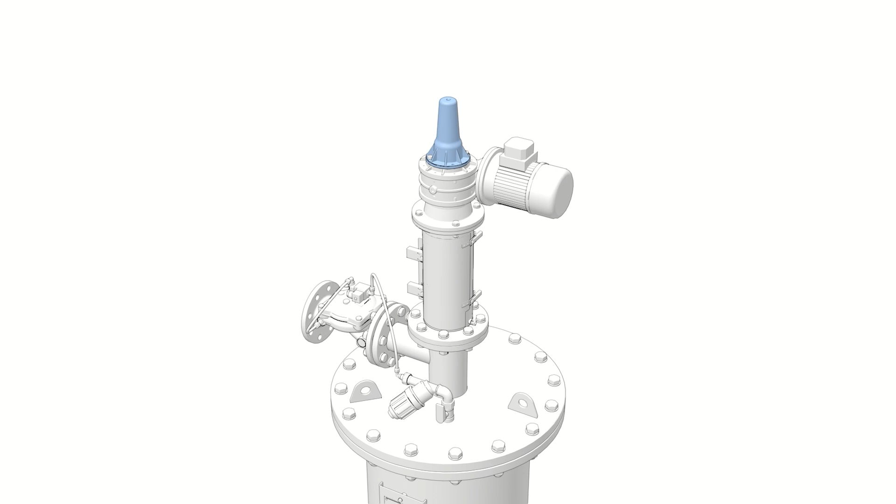To disassemble the drive unit, start with removing the cover by using an Allen wrench to release the 2 screws and remove the drive unit cover. Release the 2 toggle latch clamps holding the drive shaft housing cover and then remove the cover from the drive shaft housing.

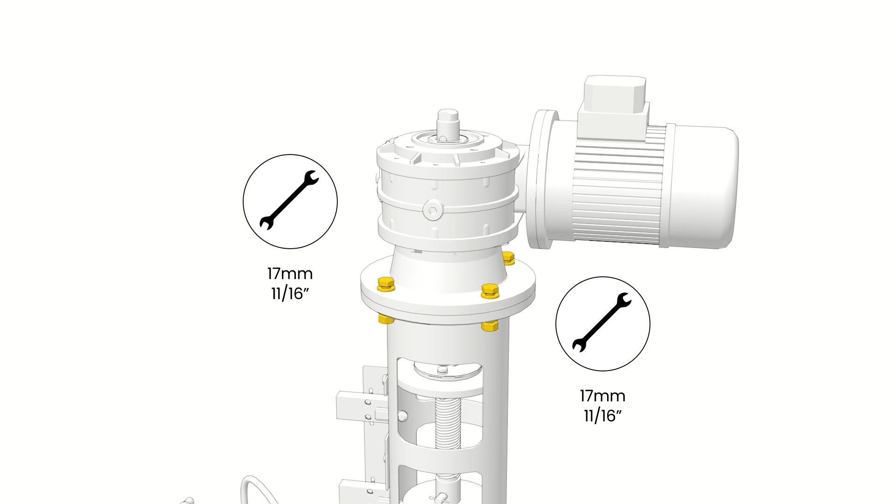To disconnect the drive unit, use 2 wrenches and release the 4 bolts. Remove the drive unit by sliding it upwards. Inspect the shaft key to check if it needs to be replaced.

To disassemble the limit switch bracket, use 2 wrenches and release the 2 bolts to disconnect the limit switch assembly. Using a screwdriver, unplug the solenoid valve's electrical connector.

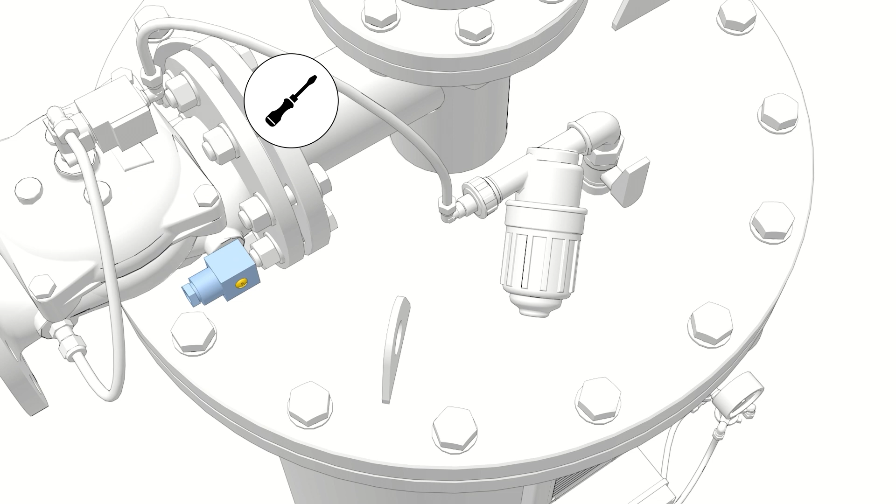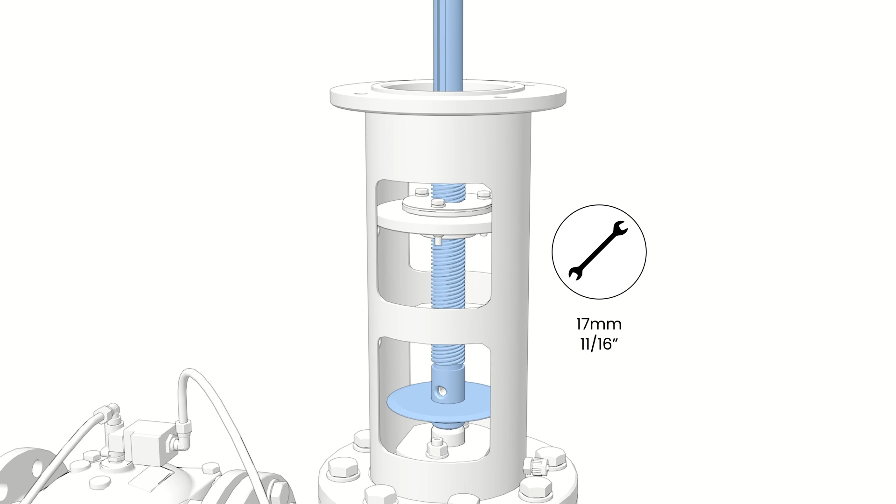Disassembling the drive shaft housing requires using pliers to remove the safety split pin, which will allow pulling out the connecting pin. Using a wrench, rotate the drive shaft counterclockwise to separate it from the scanner shaft. Using 2 wrenches, release the 8 bolts and remove the housing.

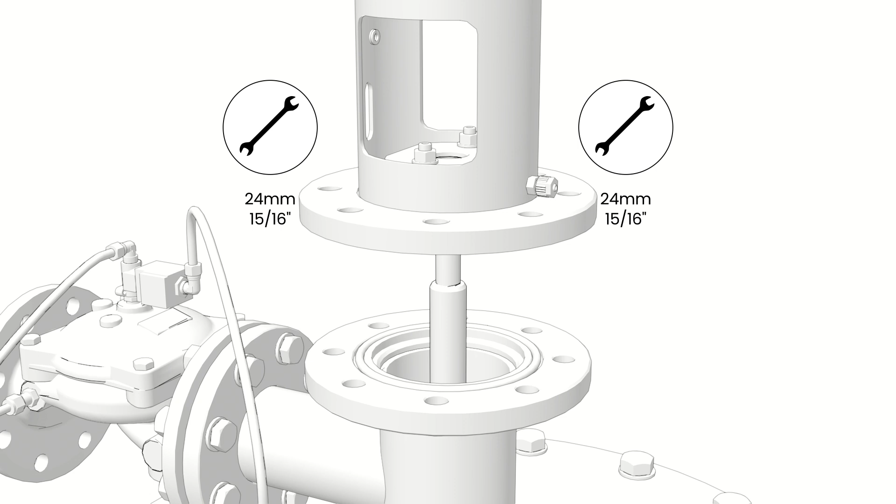When the drive shaft is disconnected, use a wrench to unscrew the sealing flange assembly tightening nuts. Using a flat screwdriver, remove the sealing flange assembly, replace with a new one, and tighten the 2 nuts with a wrench. Replace the drive shaft housing O-ring.

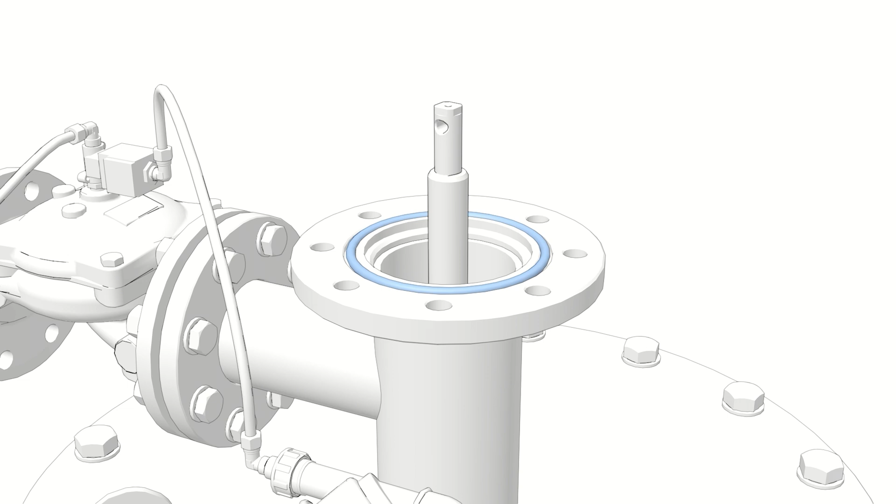Before disassembling the filter lid, remove any loose items from the lid surface. Using 2 wrenches, release all bolts holding the filter lid in place. Before lifting the lid, please be advised that the lifting device must comply with local regulations.

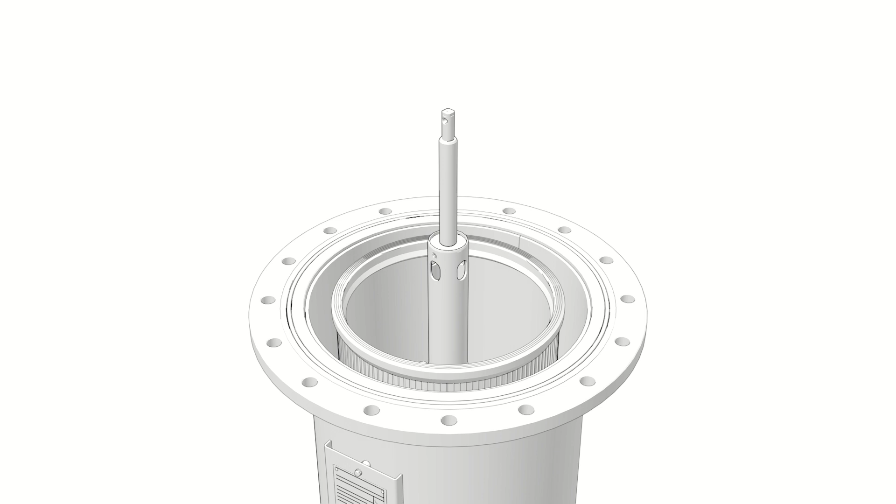Connect the lifting device to the 3 lifting lugs located on the filter's lid and safely lift the lid over the scanner shaft and move the lid away from the filter. While the filter's lid is lifted, remove the upper bearing's inner O-ring and replace it with a new one. And then also remove and replace the housing O-ring.

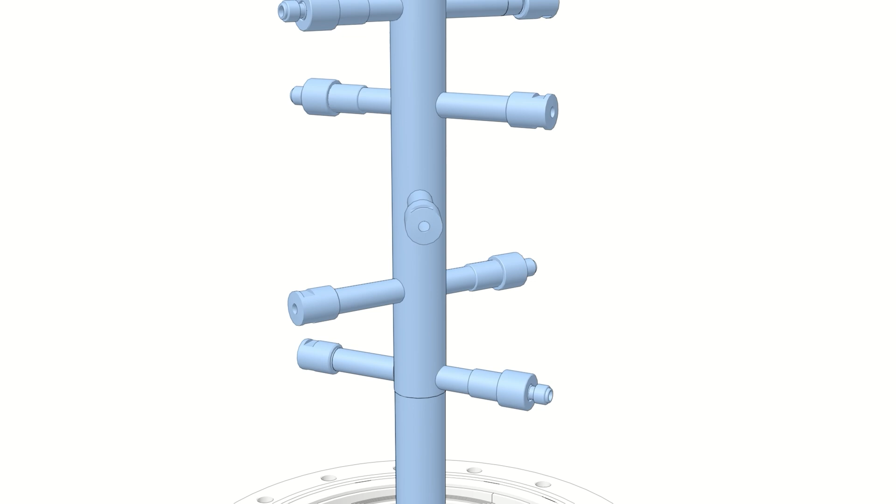For suction scanner maintenance, first pull out the scanner and inspect what kind of nozzle system is installed. For standard nozzle system, remove the nozzle cap and replace it with a new one using a wrench or groove joint pliers. For SLN nozzle system, remove and replace the SLN cap and O-ring.

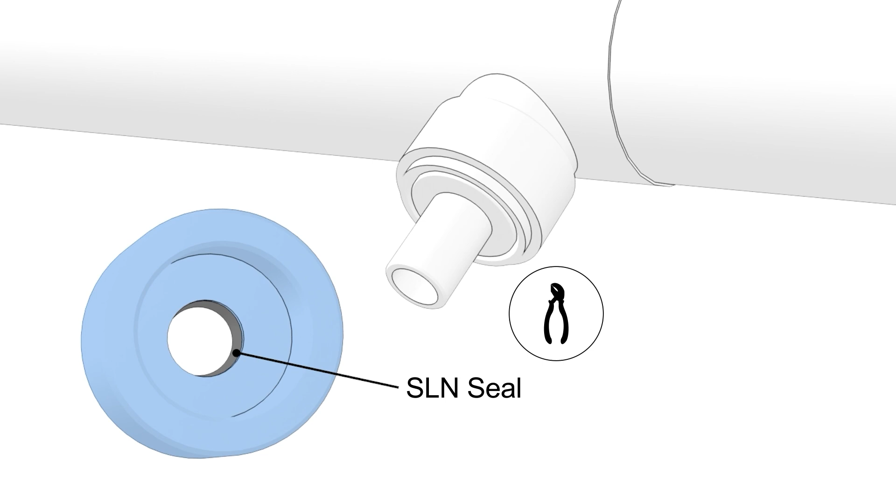Using groove joint pliers, remove the tightening nut and replace its SLN seal. Remove the SLN housing with its spring and sealing parts. Inspect and clean the sealing items. Replace the SLN seal with a new one. Insert the SLN housing with its spring and sealing parts. Slightly tighten the tightening nut and reattach the SLN cap.

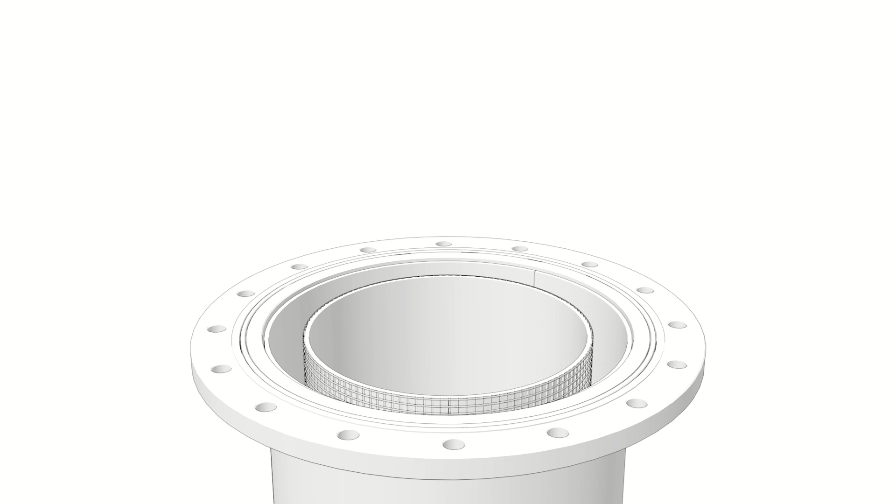Screen element maintenance requires lifting out the screen using designated lifting lugs. First, remove the upper screen seal. Hold the lifting lug to loosen the wing nut and place the lifting lug over the top edge of the screen, with the wing nut located on the inside of the screen.

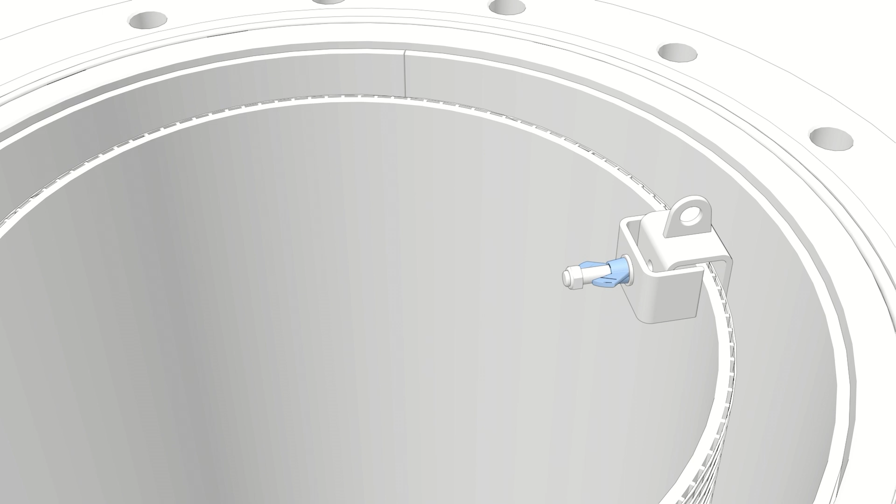Make sure the lifting lug ledge is located underneath the screen's outer reinforcement ring. Hold the lifting lug in position and rotate the wing nut clockwise to secure it against the screen. Attach a shackle fitted with a sling to the lifting lug.

Pull upward quickly to verify that the lifting lug is securely attached and that the ledge is engaged with the ring. Repeat the previous steps to position the second lifting lug. Place this lug 180 degrees opposite the first lifting lug.

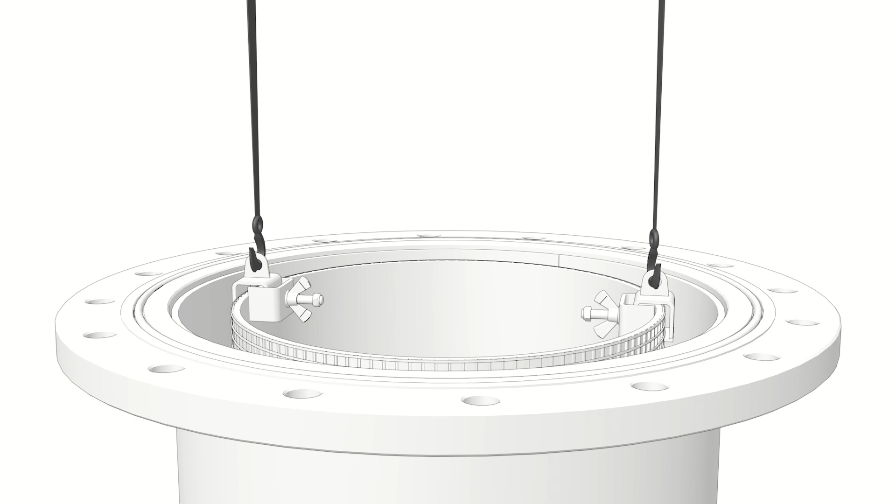Connect the lifting device to the lifting assembly and slowly remove the screen from the filter housing. Guide the screen as it is lifted to prevent damaging the filter housing coating. Move the screen away from the filter's housing. The screen should never be lifted over anyone's head.

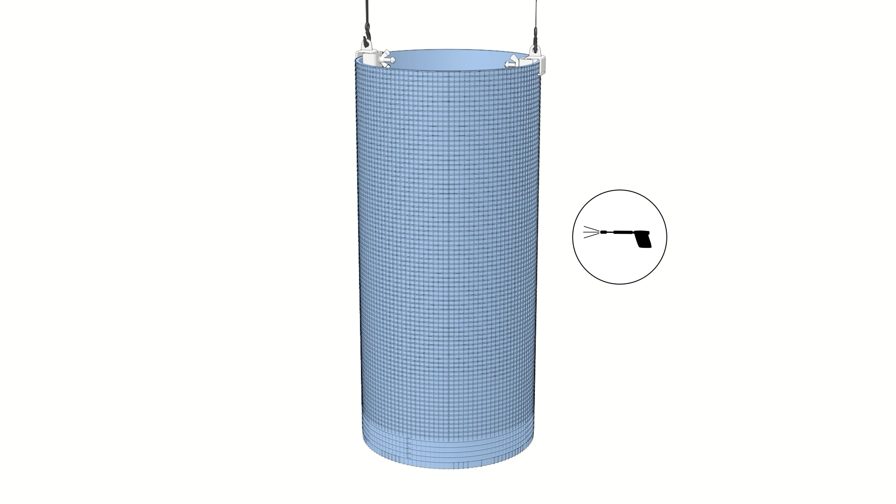Remove the lower screen seal. Using a high-pressure cleaner, wash the screen element thoroughly. Pull out the screen support from the filter housing and clean it. Replace the screen support inner O-ring and lubricate using silicone grease.

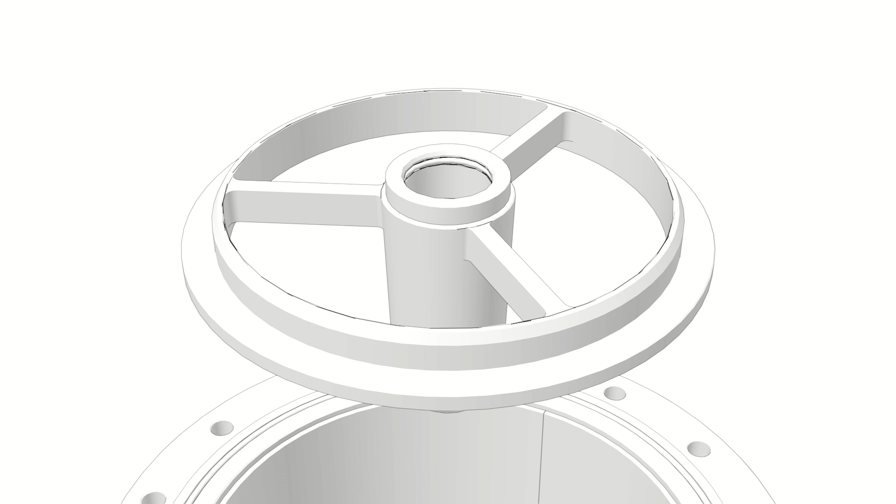After cleaning the screen, start to reassemble the filter. Before reassembling, note that all replaced parts should be lubricated and well installed. Start with verifying that the new lubricated lower bearing O-ring is in place and insert the screen support into the filter housing. Reattach the lifting lugs to the screen.

Using the lifting device, lift the screen element and install a new lower screen seal on the lower edge of the screen. Place the screen inside the filter's housing and make sure it's properly placed on its support. Remove the sling and the lifting lugs from the screen.

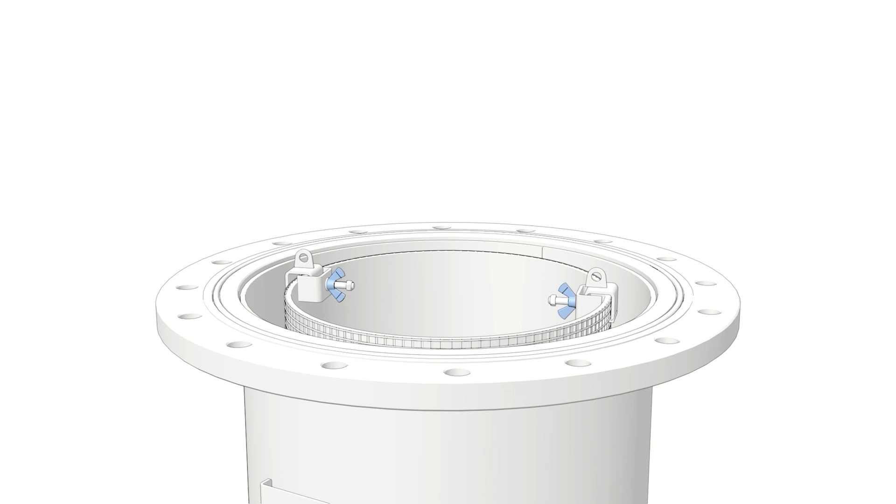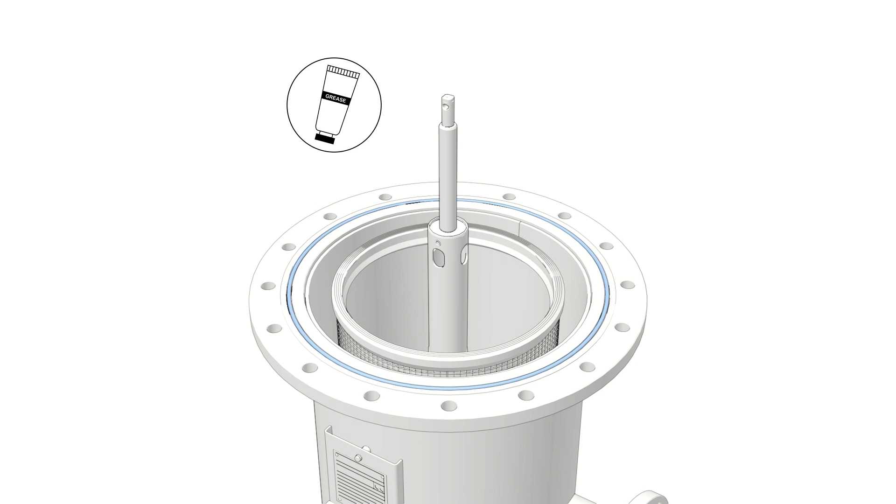Check the scanner and verify that all required parts have been replaced. Insert the scanner into the filter. Attach a new screen seal to the upper screen edge. Lubricate the seal with silicone grease. Before reattaching the filter's lid, lubricate the filter housing O-ring using silicone grease.

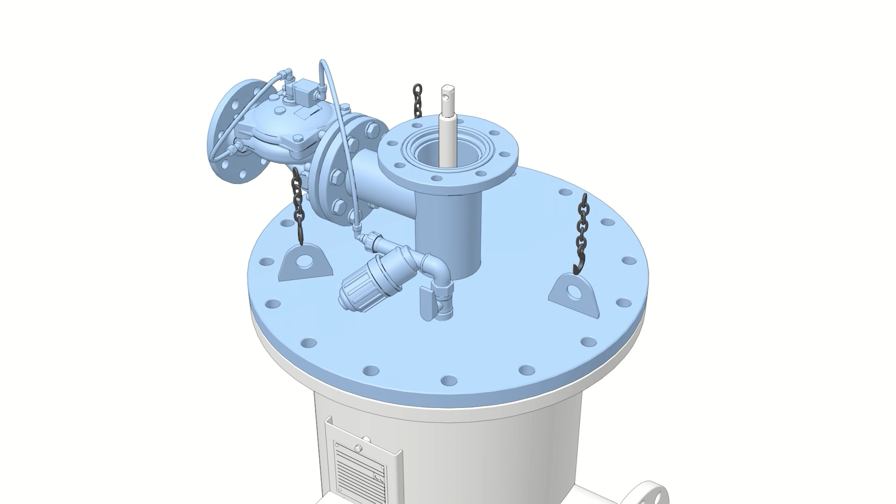To reattach the filter's lid, connect the lifting device to the 3 lifting lugs on top of the filter lid. Prior to the assembly, verify that all seals and O-rings are lubricated. Position the filter lid onto the filter housing and ensure that the suction scanner shaft is properly positioned through the lid center. Verify the flushing valve orientation. Using 2 wrenches, slightly tighten all lid bolts using a cross-bolting sequence.

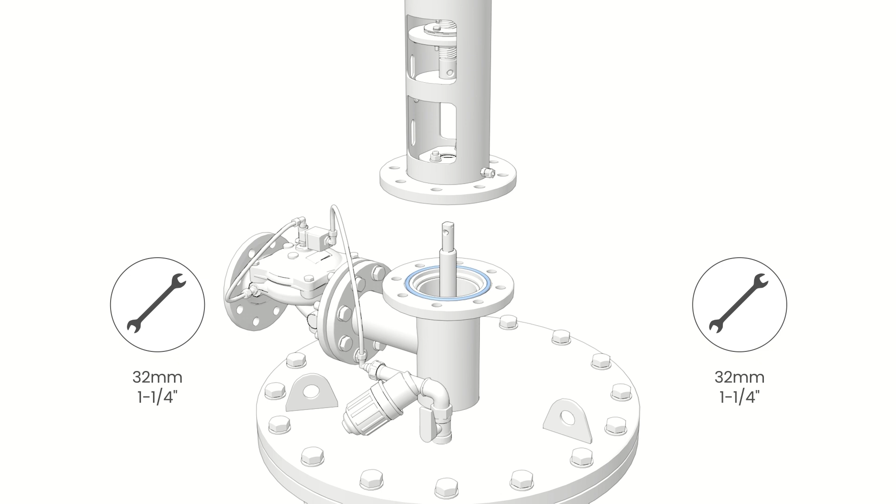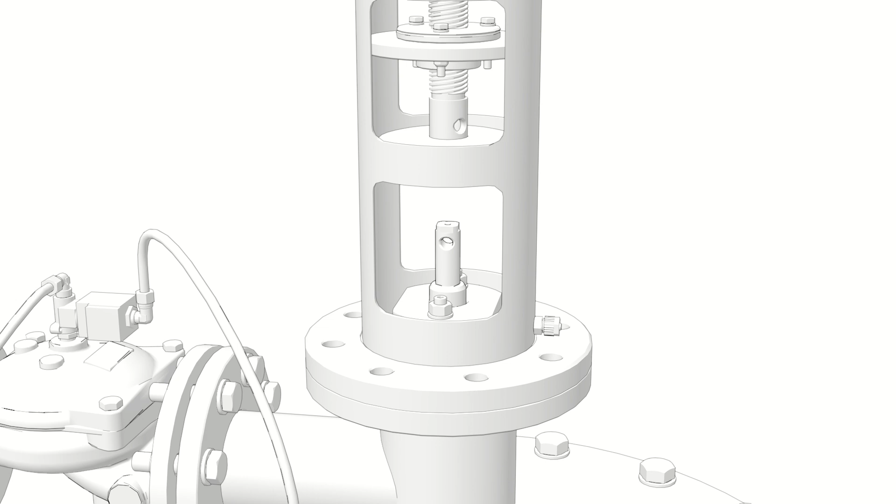Before reassembling the drive shaft housing, verify that the sealing flange has been replaced and lubricate the new sealing flange with silicone grease. Reinstall the drive shaft housing in its place. Verify the orientation and that the connecting pin bore is accessible. Using 2 wrenches, tighten the 8 bolts. Do not apply final torque.

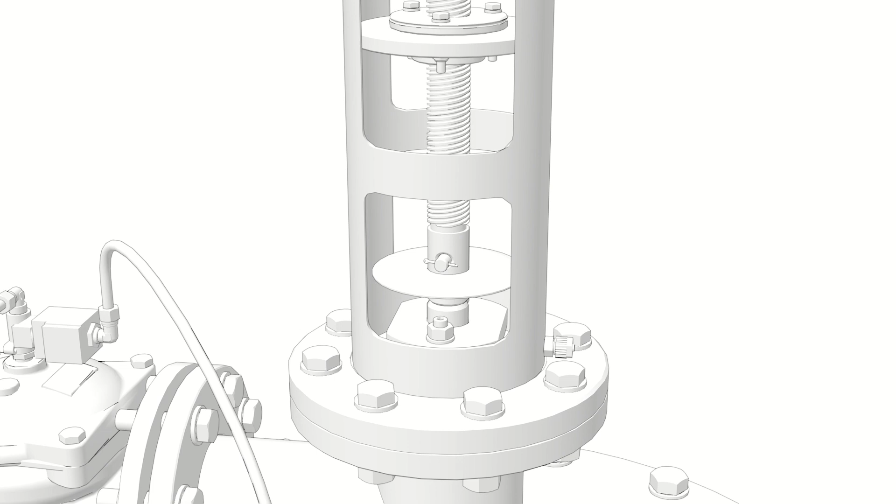Using a wrench, rotate the drive shaft downward, clockwise, until it fits the scanner's shaft. To connect the drive shaft to the scanner, insert the connecting pin and secure it with a safety split pin and bend it to ensure it stays in place. Slightly rotate the drive shaft upward and connect the limit switch assembly. Verify that the limit switch plate is located between the 2 limit switches. Firmly tighten the limit switch assembly bolts using 2 wrenches.

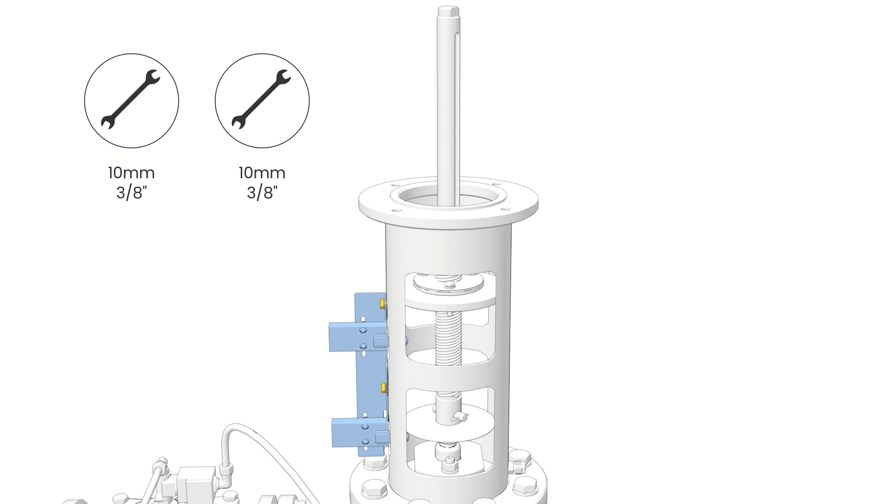Before connecting the drive unit, inspect the shaft key and replace if required. Insert the shaft key into the designated groove. Lubricate the shaft key and the shaft with non-melting grease. Slide the drive unit onto the drive shaft. Using 2 wrenches, attach the drive unit and tighten the 4 bolts.

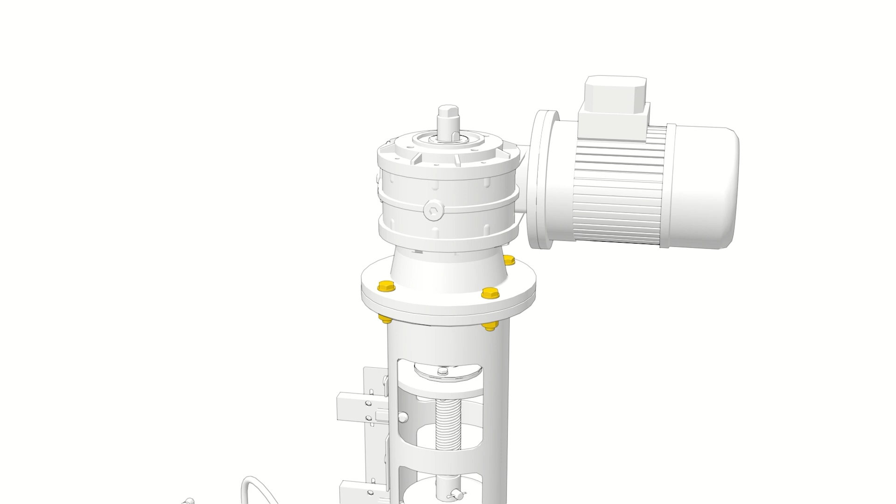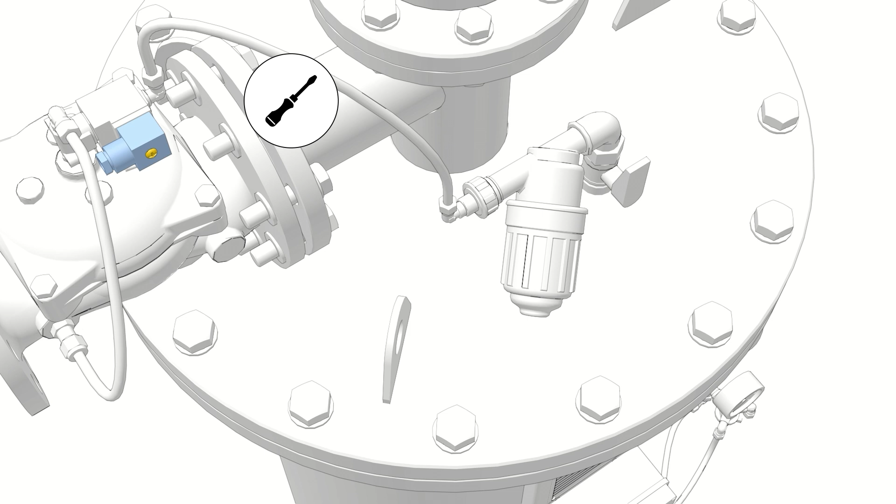Securely tighten the lid and drive shaft housing bolts using a cross-bolting sequence. Lubricate the threaded section of the drive shaft with non-melting grease. Thoroughly wash the control filter, connect the solenoid valve connector, and secure it using a screwdriver. Reconnect the flushing valve piping.

After reassembling the filter, follow the steps below. First, reconnect the power supply. 2. Initiate flushing cycle and verify proper operation. 3. Close the drain valve. 4. Gradually open the inlet valve and fill the filter with water. 5. Initiate flushing cycle and check for any leaks.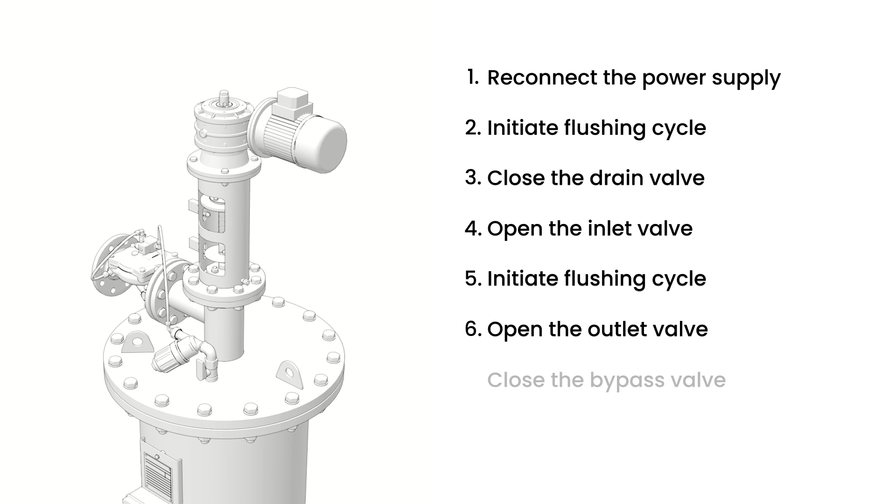6. Open the outlet valve. 7. Close the bypass valve. 8. Reinstall the drive unit cover using an Allen key to secure the 2 screws. 9. Reinstall the drive shaft housing cover and secure it using the 2 toggle latch clamps. The EBS is now back in operation.